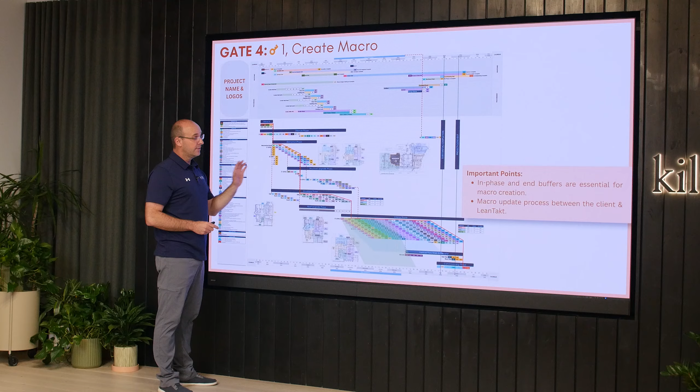So in this macro level takt plan, the key points are that each phase has a milestone and buffers, and that you have an overall plan that you can review. This is your strategy. Now what I want to show you here is at the bottom. Anna did this for me so I could show you this.

If this is your macro level strategy, which is competitive, you can win work with it, and it's fair to the owner, and it's according to what the industry can typically do, post pull plan, meaning once you get the trade partners on board, you should be able to incline that and have an earlier target date, which will be what you call your norm. And this green image right here is what we would call your backup.

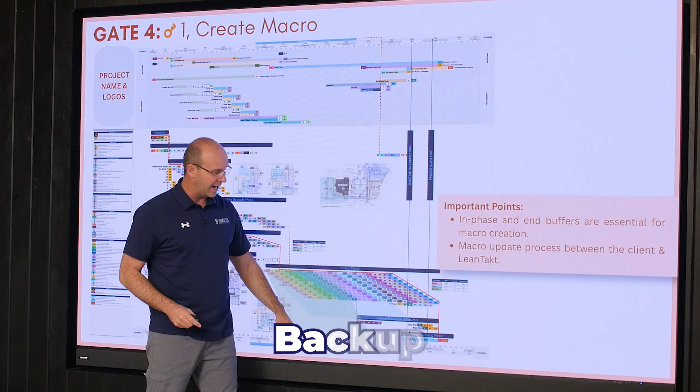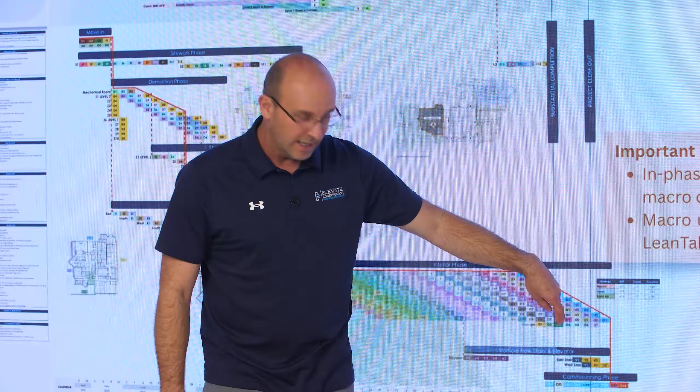Meaning when you change the zoning strategies, this end date will pull in, pull in. So the calculator will calculate these phases to where this is your milestone, but we will post-pull plan gain buffers. And then if we ever experience a big force majeure problem or the owner wants us to accelerate, we actually have a backup strategy as well.

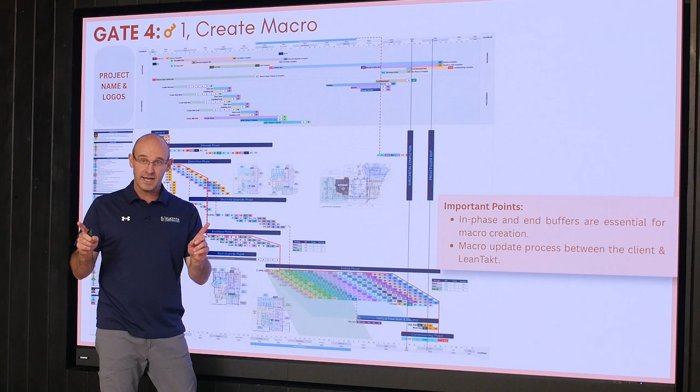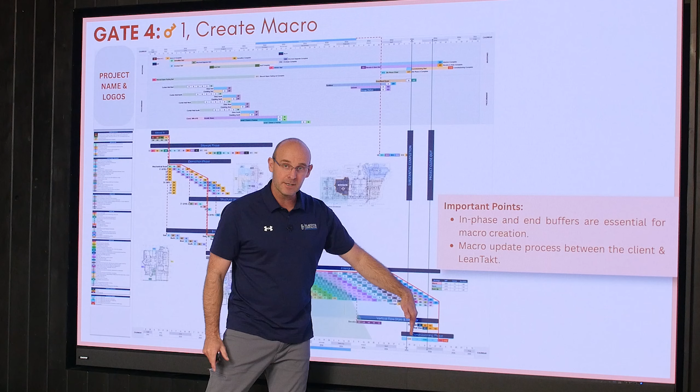And the key to remember here is that with these different options, 1, 2, 3, we never shorten the trade partner's time, the time that they have to do their activities. It never shortens their durations, but it still inclines the phase because you have smaller batch sizes. So your macro, in summary, sets the milestones, the strategy, and enables us through the calculator to later gain buffers for our production target and have a backup.

So that's what we're doing in this phase, and I want to see that fairly well put together by gate 4. Now the second thing is pull plan dates. When I say guess here, because the biggest sin in takt planning and in construction planning in general is I'm waiting. I'm waiting for the procurement log. I'm waiting because I don't have design. We don't wait for anything. And I'm not trying to provide a lecture. I'm just saying our folks at LeanTakt are constantly moving forward.

Procurement, I don't care if we're using ChatGPT right out of the gate. The macro level takt plan, I can make it off of a napkin sketch. Pull plan dates, let's go. I don't need a perfect date to schedule a pull plan. We never, ever wait at LeanTakt and Elevate. So that's why I say guess. I don't care if it's a guess. Let's get that on the calendar and go.

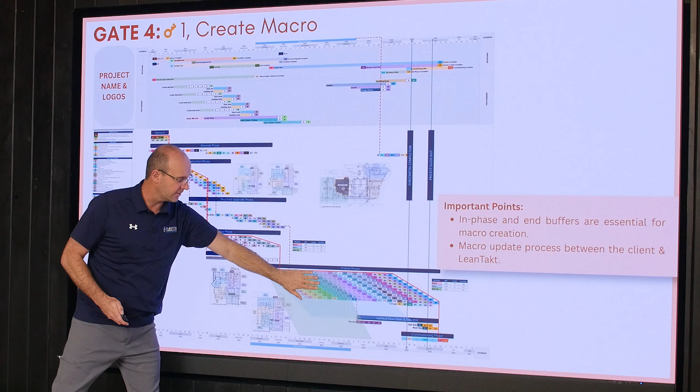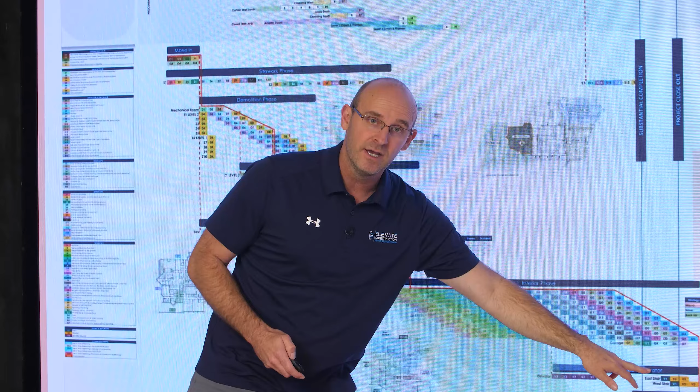So for each of those phases, so in your macro you have phase, phase, phase, phase, phase, right? I want to see when is the date where you'll do the pull plan, where you still have time if you need to redo the pull plan, and when you start the actual phase. And I want this date to be 3 months at least before the phase starts if possible. And so if we set these dates, then we can make sure that we'll get the pull plan and realize this production level strategy in enough time for us to execute that phase properly.

Now the other thing, this might sound silly, but please bear with me, is as a part of gate 4, we want to make sure that you're planning to create the visuals and the layout of your conference room trailer properly. Now you might be like, Jason, I don't need your help with that. Hey, I love you all very much. This is an overall system. We've got to make sure that it's planned properly. And two of the most important things that I need to support you is to have the yellow takt boards on the wall and the blue identify boards.

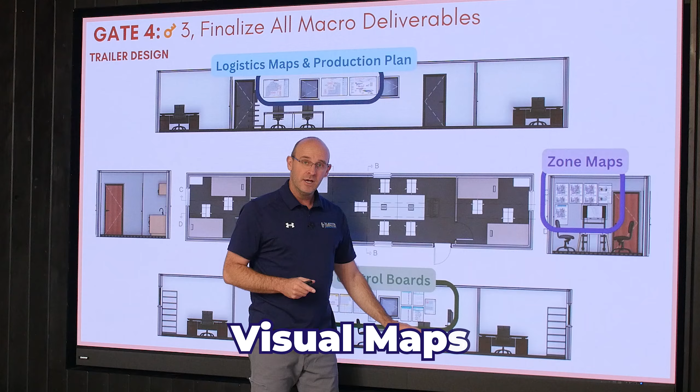Now these blue identify boards will have visual maps where in your trade partner meetings you will identify, discuss, and solve roadblocks. These must be visual. At the front of this overall conference room, you will have your TV screen and your other maps. And on the other wall, you can have your logistics plan, your macro, your other visuals. But I've got to have these yellow boards and these blue boards, and I need you to trust me.

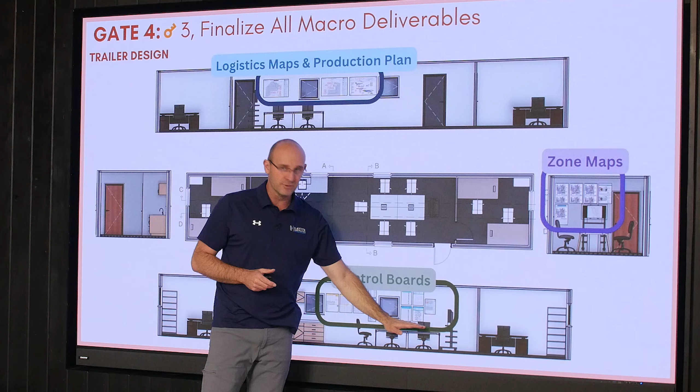So each project that we work with, each client that we work with, our VDC group, our AI VDC group, will literally model your trailer, model the visuals, and work with you on that. But, and I'm trying to be connecting, if you're like, no, I don't want those, it will break the system.

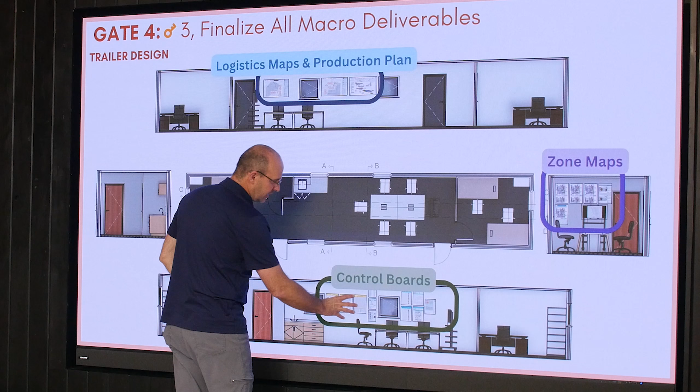Because these boards are designed to organize your project delivery team, identify, discuss, and solve roadblocks. Your screen in the front is to pull up all of your other scheduling deliverables for the meeting. And if we don't have 1, 2, 3, then your conference room won't be set up to have the right meeting. So please, please, please trust us. Please work with us on the conference room layout.

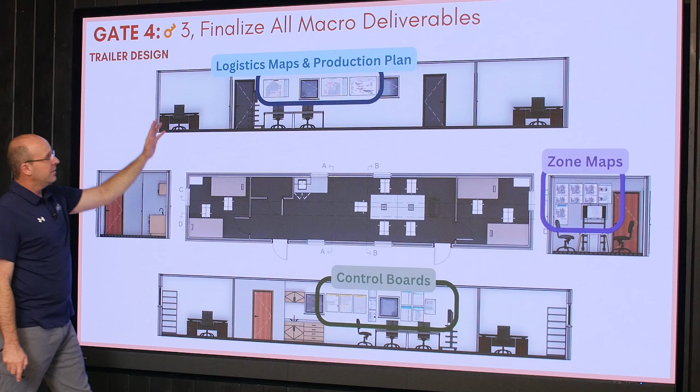It must be set up properly because people talk about what they see. And if you can't see the right things, you won't talk about the right things, which means you won't have the right meetings, which means you won't have the right outcomes. So we must finalize all of the macro deliverables and make sure that those macro deliverables, remember we talked about the logistics plans, are up to date and posted. That our zone maps are up to date and posted, and down here on the blue boards.

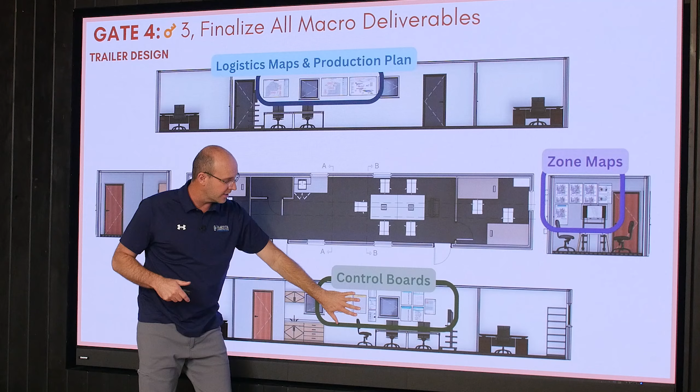That your macro level Takt plan is up to date and posted, especially if you have executives walking into your trailer. And that all of your Takt steering and control boards are up to date and posted. And that anything you want to see on the wall is final formatted so that your team can interact the way they want, and so that your executives can see evidence of these systems being implemented on site, and so that people's mindsets can start training in this direction. So this is absolutely crucial.

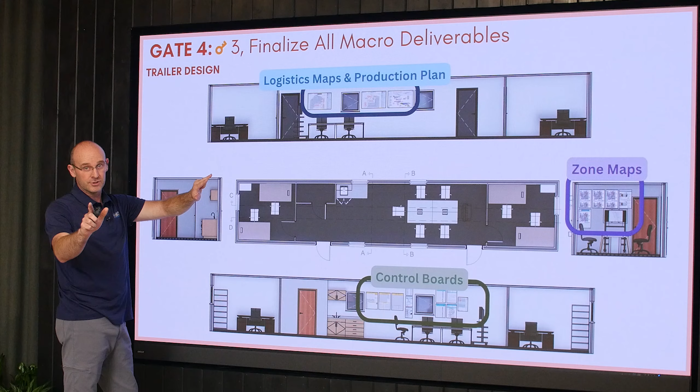So we will complete the logistics plan, the zone maps, the macro level Takt plan with you but for you, meaning doing the things that you don't need to be doing because your job is more important, and getting the control boards ready to go. The next step is to make sure that this is starting to be reviewed and used in meetings. If we post these and they're not being used, it doesn't do us much good. The key here is, can we get your conference room ready to go to where these are the tools from which the job is being run?

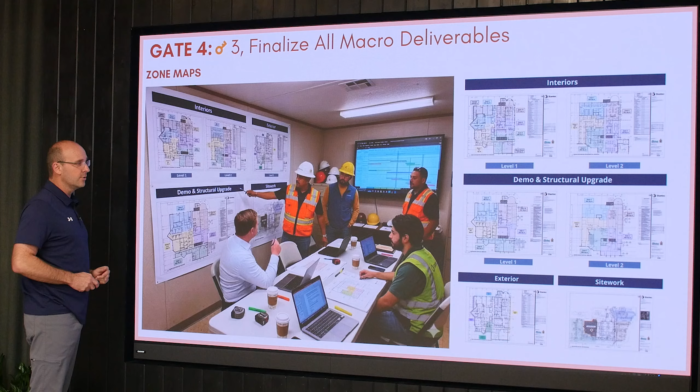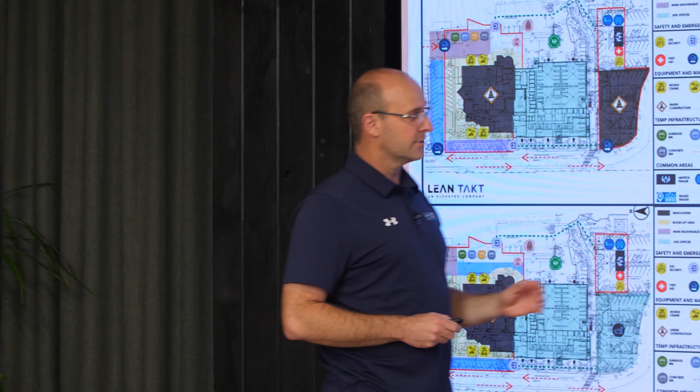So yes, we finalized all the macro deliverables, but are we using them? And the key here is that however you position them on the wall, they are useful enough and understood by the project team, and if there's any corrections that need to be made, that we've made them for you. So the other part to this Gate 4 is that we review this internally. Everything that we've made thus far, by the way, we have a development checklist where we make sure we're on track. Everything that we develop, we put on a Miro board and we review internally with the entire company.

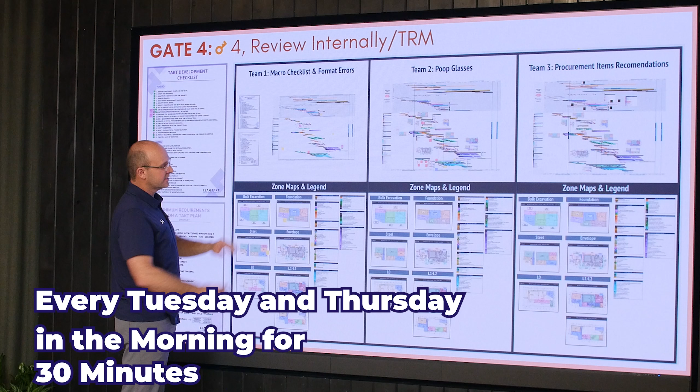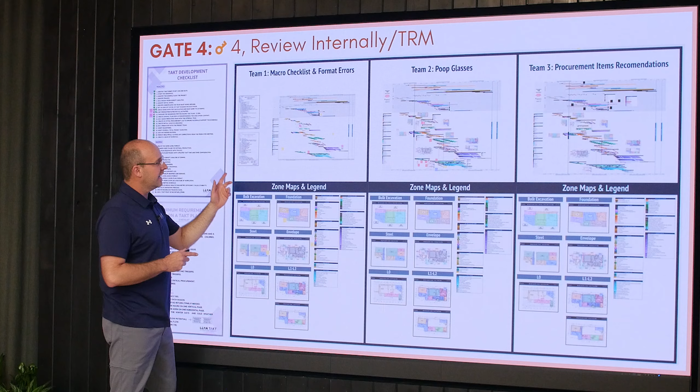Every Tuesday and Thursday in the morning for 30 minutes, we will bring up a project and say, hey, we're reviewing project such and such. These are the steps, and we have 5 different checklists that we go through that will review the format, the strategy, optimization strategies, layout, and flow of everything that we have created for you. So it's not just the internal team or the cluster or the pod that's working on this. We get the fresh eyes from the entire company. That is a requirement in Gate 4 to make sure that we are doing our internal checks.

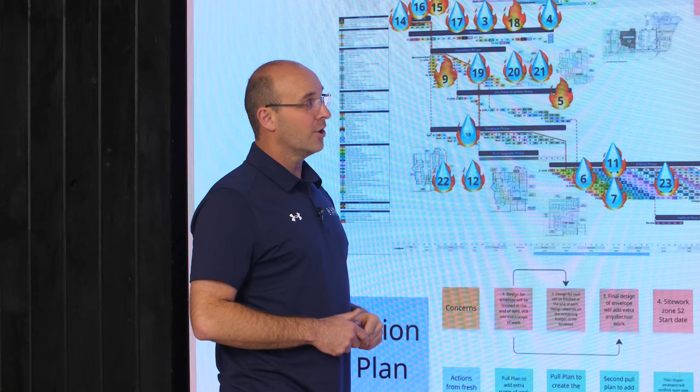The other thing that we want to do, which is even more important than the last one, is to review it with the project team. Now here's the thing that I love. I love the way this is put together. You see these little fireballs with numbers. The fireballs with numbers over here are problems that the project team sees with this overall strategic plan. And the little blue water droplets are, okay, we've created a solution. So if you see this, it just means there's a problem. If you see this with the water droplet, it means we also have a mitigation strategy for that.

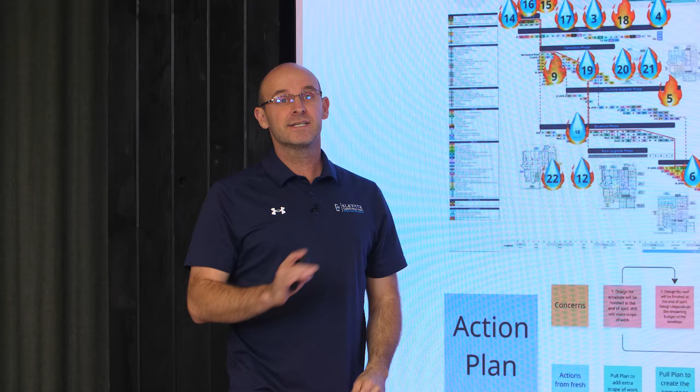So here's the point with this. We want to tear this plan apart, completely, brutally tear it apart. This is like the Pixar brain trusts. Now, we don't want to make anybody cry, but artists literally will go to a Pixar brain trust and leave crying because their original story, their original timeline, their original characters, they were all torn apart. And I don't know if you've seen any of the recent movies from either Pixar or DreamWorks, but they are phenomenal. Like Hopper, phenomenal. Bad Guys 2, phenomenal.

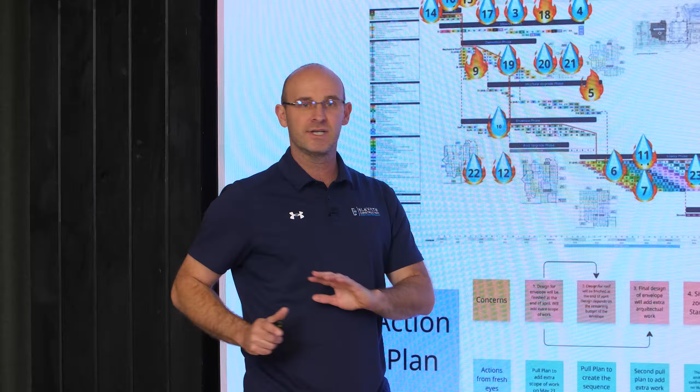Let me talk about Bad Guys 2 for just a minute. There wasn't a second of wasted time in that movie. Everything, the plot flowed, the characters were well developed, it was interesting, it was funny. I was laughing. I'm a 44-year-old man. I'm freaking laughing at a kid's movie because they tore it apart. Please, please, please, I'm asking you, I'm begging you, please do not skip the process of tearing this apart. And you can read a Takt plan.

If somebody's like, oh, I don't know how to read it. Yes, you do. I love you, and I'm not being condescending. The phase labels are here. You can see exactly what's happening. These are the number of zones. These are the activities. You can see how they're tied in.

Dig into this and you will have a great plan. The entire team will see it. You will utilize the genius of the team according to lean thinking. And if you're a project director or a general superintendent, what better visual could you have than this to make sure that your project is set to be on track?

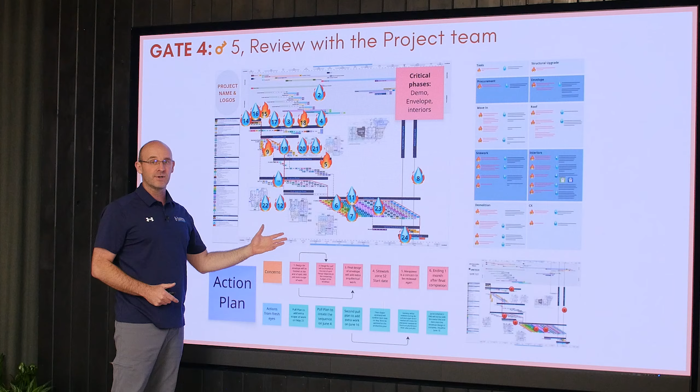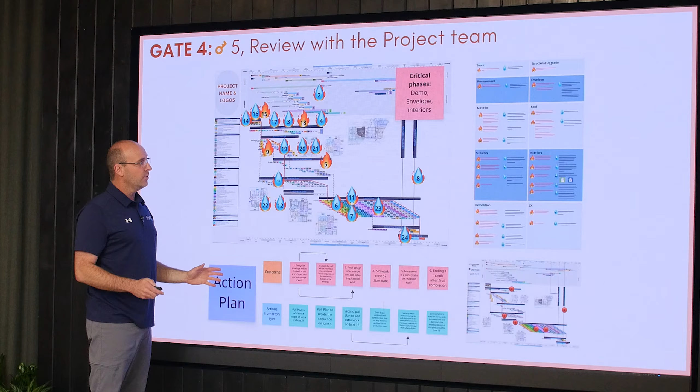If I was a general superintendent or field director again or a project director again, I would never have a project where I couldn't see the project at a glance and the risks. This is how we make sure the project goes well. So tear it apart and review this in depth, and our team will ask you to do that with the overall plan. And all of this is leading towards our last step, which is the fresh eyes meeting.

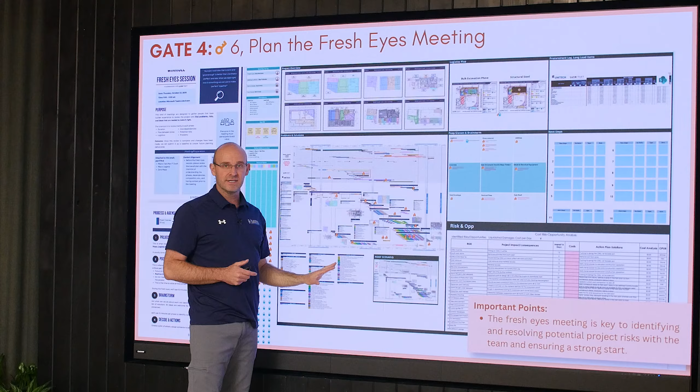Everything is culminating here. We have instructions on how to host the fresh eyes meeting, the agenda, we have template boards, but the bottom line is we need to get as many fresh sets of eyes who have experience with this type of project into a room, and excuse my language, but we're going to go into the poop glasses mode, meaning for 15, 20 minutes, nobody's allowed, you can call it the real S cuss word if you want, nobody's allowed to be positive or say that's okay. We're literally just tearing it apart with guests, fresh eyes, inside this meeting.

And the idea here is we're doing a Pixar brain trust. We're doing a DreamWorks review. They make those movies 8 times before you see the final 9th movie. So we at least need to do this once. Before this goes out to trade partners and before we attempt to execute it, we need to tear it apart and remake the movie, as they say, with fresh eyes so that we get a different perspective.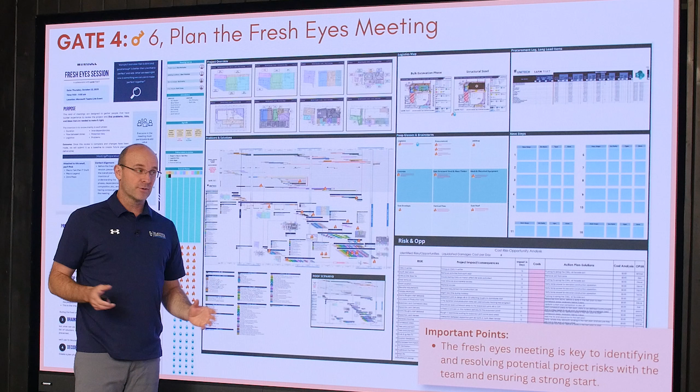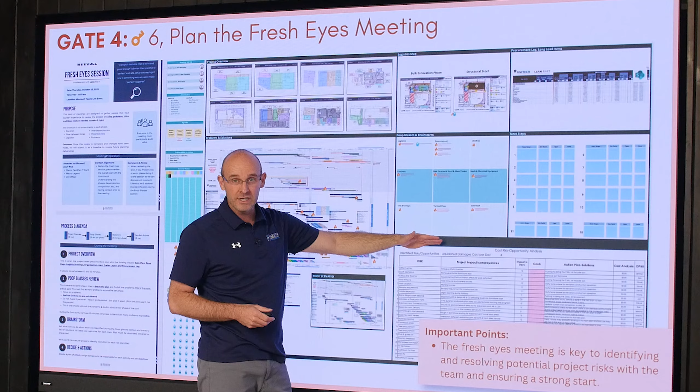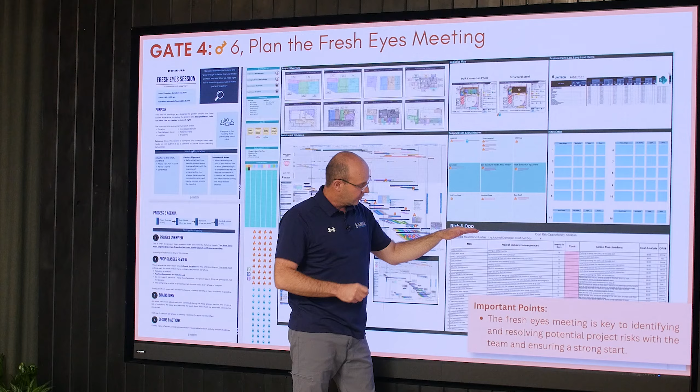And guess what? Each of these items will be cataloged as notes, and you'll also review the procurement log, but they will get cataloged as notes. And if they are real risks or opportunities, they will go on the risk and opportunity register. This is one of the most important tools that we have. Not only will we now have a really nice baseline strategy, not CPM baseline, but baseline strategy, and a project that we can build with great milestones that's going to win, but also we have a risk and opportunity register where the team can every week go through each of the items and say who's on point to make sure that these days and dollars don't actually hit us and hurt us.

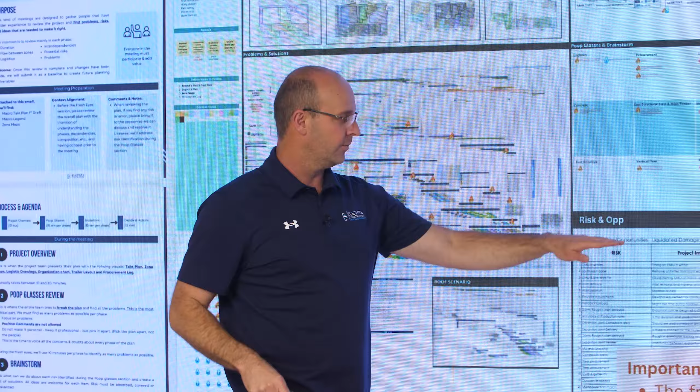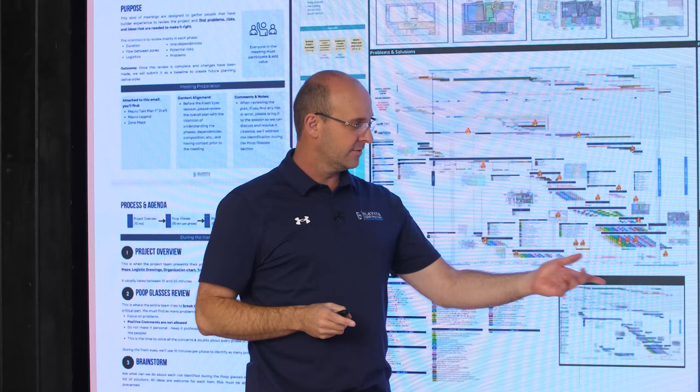There's a company we worked with a long time ago, their gross profit plateaued, and we were like, no, you need a risk and opportunity register. Every week, your team's trying to get rid of the risks and realize opportunities. And their gross profit target started to climb. They're at 26% and climbing as of the time that we stopped doing work because they were good to go. We finished our retainer. And literally, it was like the most beautiful development in the company because they were actually increasing their financial health.

So the key is go into this fresh eyes meeting with new sets of eyes, tear the plan apart, which gets us a great plan, look at the procurement, look for all of the risks, and then log them if they are real. There's only a couple ways to get rid of risks. You can cover it with contingency, you can plan it away to where it doesn't happen, or you can take it out of fee, which nobody's going to want to do. But wish thinking, hoping it won't happen, is not a thing. There is no fourth option here. So we can't look at that and say, I think we'll be fine.

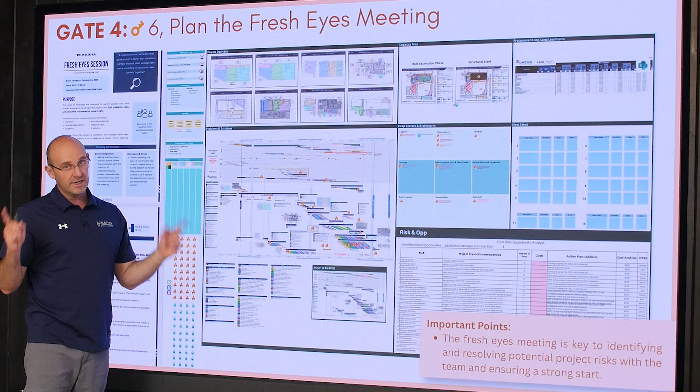We need a 10th man or woman, meaning a critical set of eyes, throughout the meeting to say, no, let's log this down, let's log this down, and make sure that those days and dollars don't actually hit us, that we actually have planned it or covered it, and we've never gotten into the trap of wish thinking. So the important point here is the fresh eyes meeting is key to identifying and resolving potential project risks with the team and ensuring a strong start. So this really is the ultimate end of gate number 4. We need to make sure that it's at least planned. And that then takes us into gate 5.1.